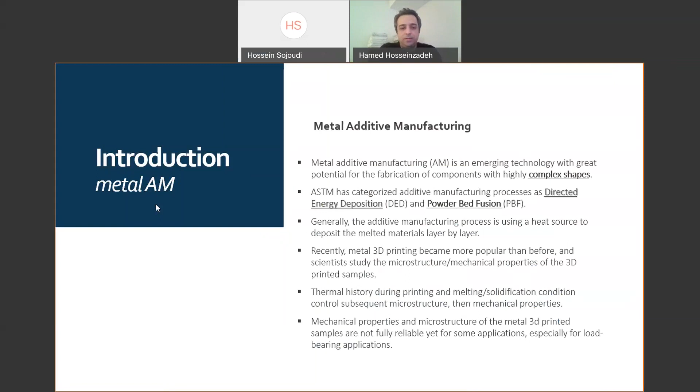Scientists are working to optimize the metal 3D printing process for commercial application. We have commercial metal 3D printers, but we still need to work to optimize the whole process. Because metal 3D printing is a complex process, and we have anisotropic material properties, innovation and improvement is difficult and expensive in this field. So we need to find a way to accelerate.

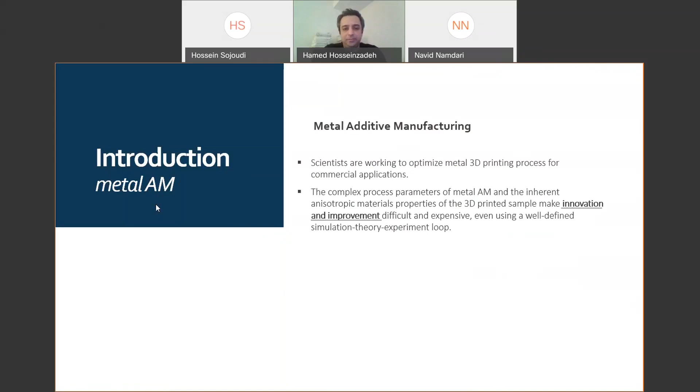So I think that it is enough to talk about metal 3D printing, because I'm sure that you are more familiar than me in this field. But about the innovation, in advanced countries like

the United States, the time from invention in the lab to a commercialized product, as an average, is 18 years. Do you have any examples where it took more than this time, or where the product could go to the market in less than 18 years? But as an average, this is the average time. If you have an idea, if you have a prototype of it in your lab, and you want to make it commercial, as an average it takes 18 years. You need to find a way to accelerate this process.

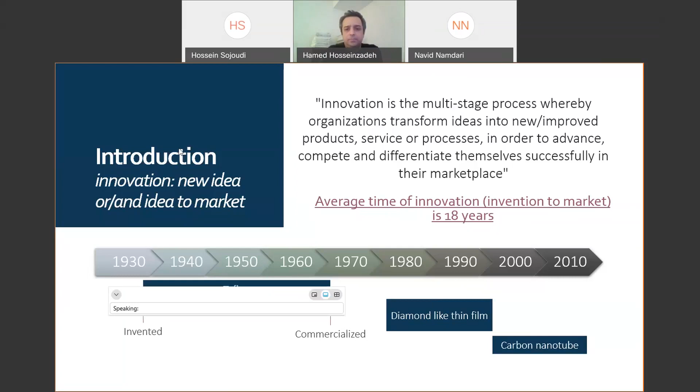So the question here is, how can we accelerate the innovation, invention and idea to market in metal additive manufacturing? I will discuss this and answer it at the end of this presentation, but please keep this question in your mind.

So we discussed the complexity of the whole process of metal additive manufacturing, and we know that computational methods could help us to understand the thermal history, thermal stress and residual stress in the whole process, which is not easy for experimental validation in this field. So simulation could help us a lot.

Okay, so we have some terms in simulation. One of the terms is ad hoc simulation, ad hoc research. In general, we have three approaches: experimental method, computer simulation, or an analytical method. You are all familiar with these three concepts. Based on the experimental method, we develop some analytical model. And when we have well defined analytical models and some experimental database, we can run computer simulation.

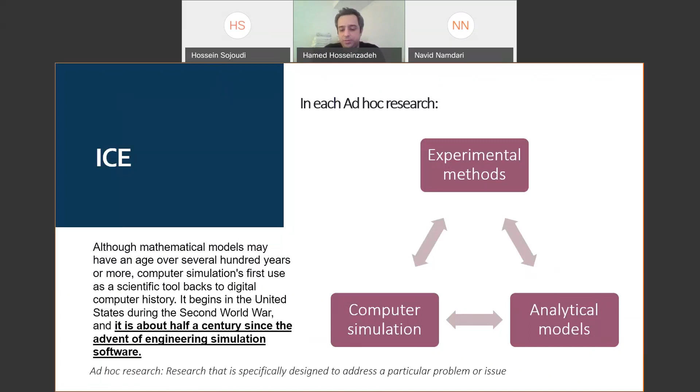Okay, so if you want to run ad hoc simulation and focus on a project, maybe we can develop a simple computer simulation. But sometimes we need to simulate the whole process and consider many parameters in our system. We need to use multi-scale, multi-physics simulation techniques, considering different scales from quantum, atomistic, to mesoscale and to macroscale.

In this case, our simulation is not ad hoc, and we use another term such as integrated computational engineering, or integrated computational material engineering. They are all relatively new disciplines, and their focus is to solve complex physical systems. This is a good approach for metal additive manufacturing, because metal additive manufacturing is a multi-scale, multi-physics, and complex system.

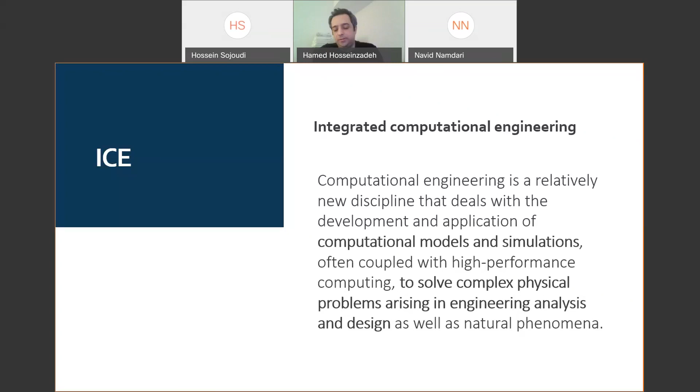And maybe for some cases we need to go to atomic scale. For example, if you want to simulate the nucleation in the melt pool, the solidification and nucleation of solid metal from the molten metal in the melt pool, we need to use quantum simulation. So we need to use the Schrödinger equation and solve quantum simulation for that. Mainly we need Newtonian mechanics, but sometimes we should use quantum simulation as well. So you can see that for computational metal additive manufacturing, we are in the quantum and classical non-relativistic simulation domain.

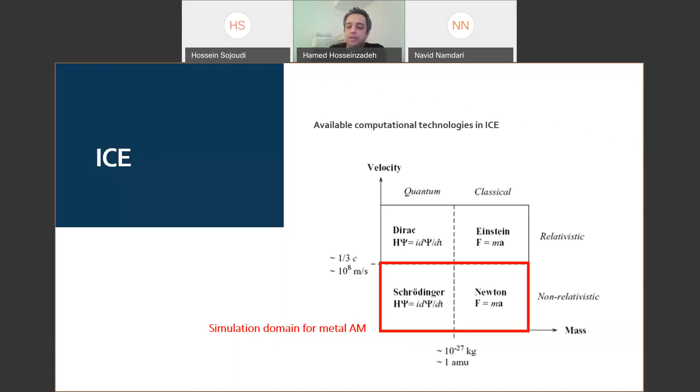So we need to check what do we have now. For Newtonian mechanics, we have conservation equations and constitutive equations. Constitutive equations are some famous equations like Fick's equation, Hooke's law, heat diffusion equation, which are developed by fitting a graph to experimental results or something like that. But conservation equations are the general concepts of balance of energy.

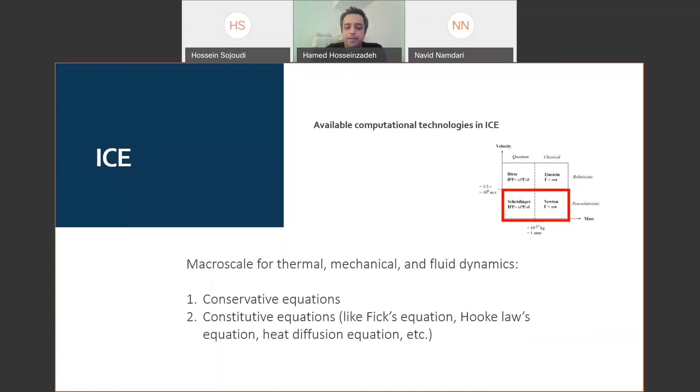We have three equations: mass, momentum, and energy. Mass and momentum are vectors, so each of them is three equations, and energy is a magnitude, so it's just one equation. Conservative equations are 7 equations. In the general form there are 3, but because we have x and y direction for equations 1 and 2, at last we have 7 equations.

Equation 1 is a continuity equation. We can discuss it later, but for the momentum, I think this is a very important equation. From this we can calculate stress, strain, deformation of the system, and internal stress in the system.

If we expand the equation, we have 3 equations in x, y, and z direction, and then you can see the details. Also, if we correlate the shear force to the viscosity by some assumptions, we can change this formula for fluid dynamics. If we use a constant viscosity concept and non-compressive fluid, which means we have constant density, this would be a Navier-Stokes equation. So you can use a momentum equation for solid and also for liquid.

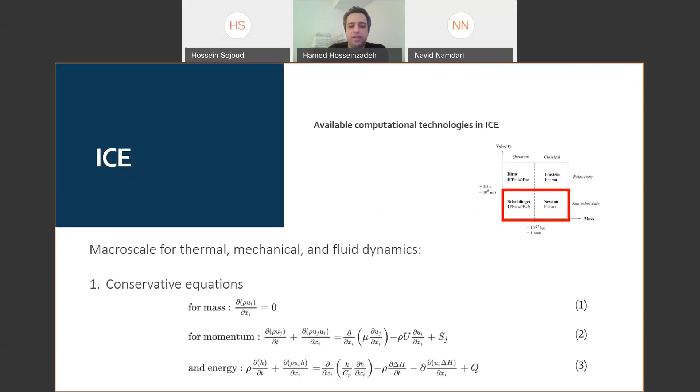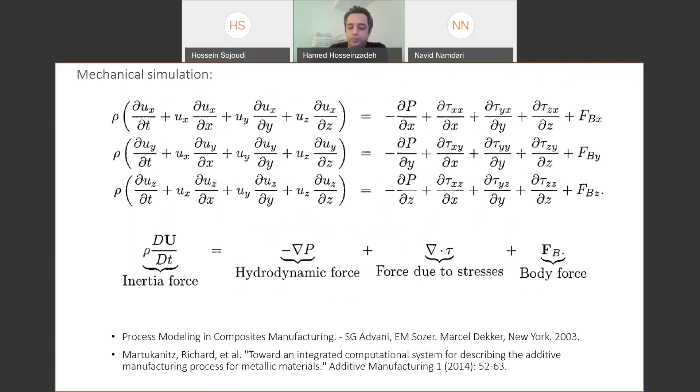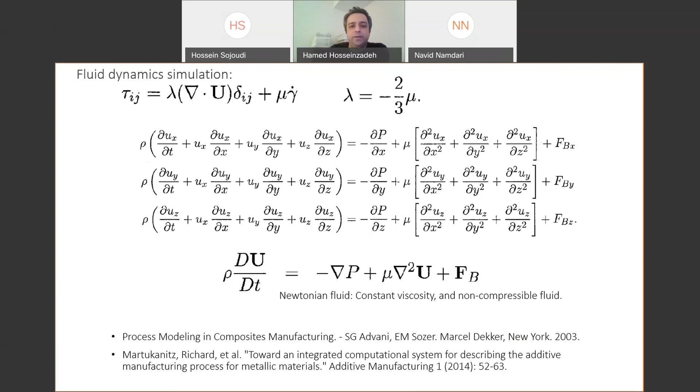The last equation, the energy equation, if we simplify it, we can calculate the temperature. So for metal 3D printing, if you want to calculate the thermal stress or residual stress, you need to use this form of the momentum equation. If you want to simulate the melt pool, we need to use the Navier-Stokes equation, but because we have a free surface, we need to add some other method, for example volume of fluid or other methods to capture movement of the surface of the melt pool. This Navier-Stokes assumption works very well for metal additive manufacturing, and also for thermal history we need this equation. They are very commonplace and simple to use.

For the mesoscale, if you want to simulate a microstructure, we need to go to mesoscale. We have many methods, but the standard methods are discrete ones and continuous ones. Discrete ones like Monte Carlo and cellular automata have probability; they have a stochastic concept.

The phase field is a continuous method. You can see the equation of that. We have an order parameter, and we develop the energy of the system based on the value of the order parameter and the slope of the order parameter. We define the energy of the system and put it in the time-dependent equation. So we minimize the energy for the order parameter, and we can capture the movement of the order parameter. The order parameter works as the interface in this.

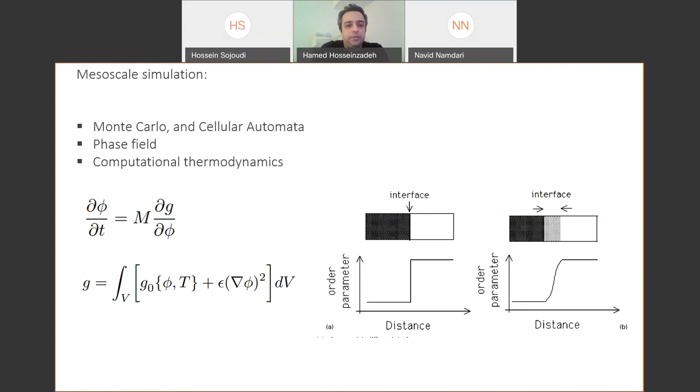So, for example, if you have a grain, a polygrain system, and you want to see the grain growth, the order parameter is the grain boundary of the system. We also have computational thermodynamic methods such as CALPHAD for predicting, for example, the binary phase diagram. Based on that, and if we have a cooling curve, we can predict the microstructure based on computational thermodynamics. So these are the three main mesoscale methods for predicting the microstructure.

We need to solve all the equations, so we need to use numerical methods. We have several famous numerical methods: finite element, finite difference, mesh-free, finite element discrete method, time domain finite difference method. If someone asks me which one is more accurate, I would say all of them are good for simulation, and it's up to you to select which one is better for you.

The accuracy of all of them is enough for most engineering applications. But according to the system, sometimes we need to use finite elements, sometimes finite difference - it depends on the system. We should discuss based on the physical system.

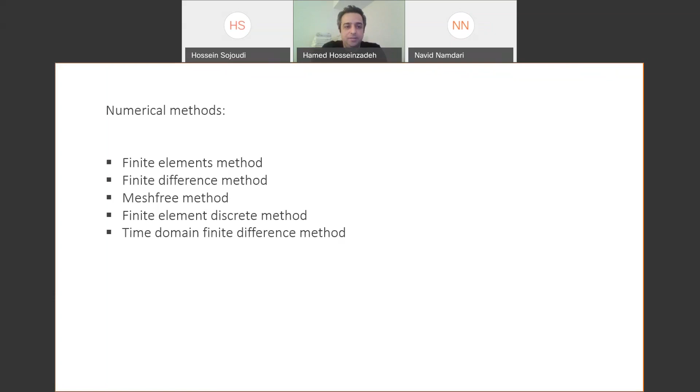Okay, so these are the general concepts and the computational technology that we have. Now I want to focus on computational metal additive manufacturing - what we want from simulation in metal additive manufacturing.

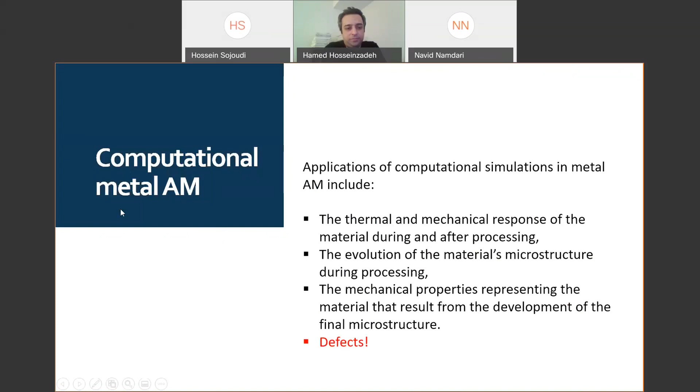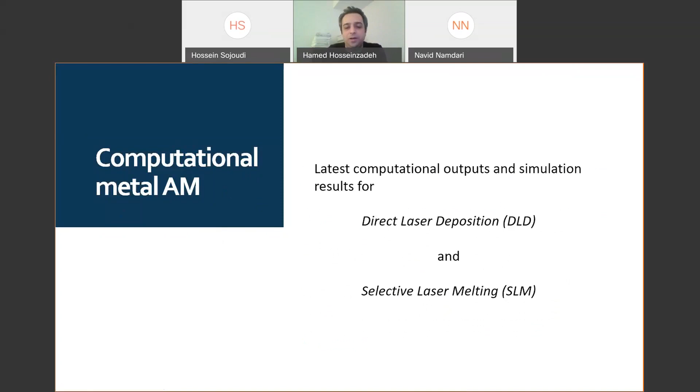As we discussed, in computational metal additive manufacturing we have two techniques: one, laser deposition; the other, selective laser melting. I'm talking about laser - we can change the heat source, but in this presentation I'll just talk about laser. Let me talk about some details about these two methods. Laser power of SLM is in the range of 200 to 400 watts. Laser power of DLD is 500 watts to 10 kilowatts, so you can see the laser power in DLD is much larger than SLM.

The other thing is the laser diameter. Laser diameter is around 100 micrometers in SLM, and in DLD method it's around 1,000 micrometers. So you can see that because of this, we have two different length scales of simulation. If we want to capture the thermal simulation in SLM, we need to have mesh size lower than the laser diameter, so the mesh size in SLM method is much lower than DLD.

The other thing is the scan speed. Scan speed in SLM is several hundred millimeters per second, but in DLD it's just several millimeters per second, maybe 1 or 2 millimeters per second. So the heat input in DLD is much larger than SLM.

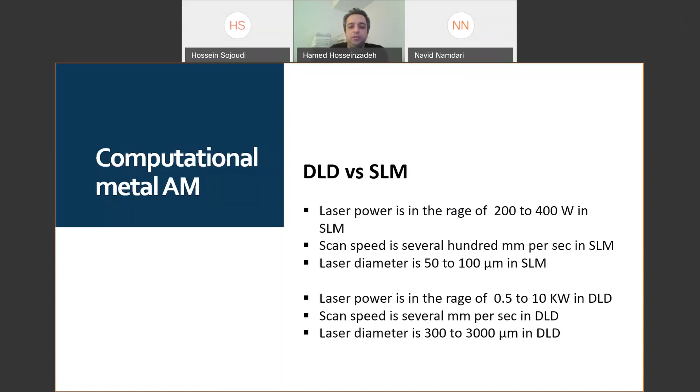Because of these example parameters, the simulation method of SLM and DLD is not the same. We need to use different assumptions, different computational methods and techniques to simulate each of them - they are completely different.

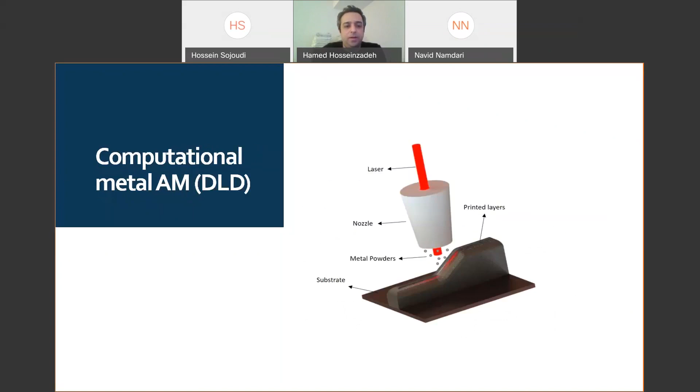So I need to discuss each of them separately. First, I want to start talking about DLD.

The first important subject in the DLD method is how we can update the simulation domain during each time step, because we have molten metal received from the printer nozzle, and we need to add this new molten metal during each time step to the simulation domain. This is very challenging if you want to consider it as a liquid, as molten metal, and use fluid dynamics. We are limited to a very small part of the sample, and we need a huge amount of CPU time. So if you want to print a larger sample to see what is the total deformation in the sample, definitely we need to use another technique.

I need to be honest with you, the only method for simulating metal DLD for a large sample is the birth and death element method, or birth element method, which means we discretize a large sample, but kill most of the elements. The value of the element is 0, so they are not involved in the simulation. When we need them, we activate them. This is the only method we have right now for the simulation of the large sample. You can see in the graph...

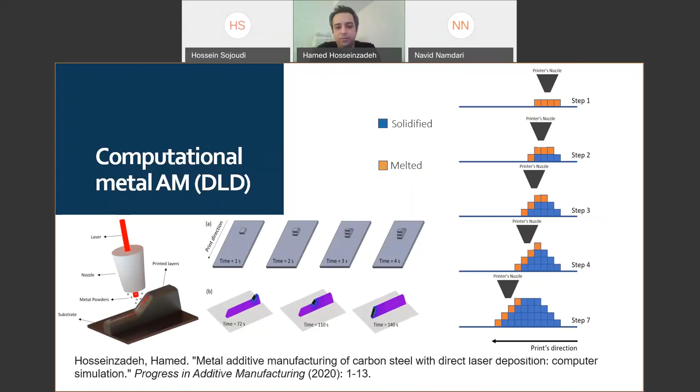You can see that from step 1 to step 7, how we add new elements. Consider each box as a computational element. At the beginning, we discretize the whole system, but all the elements are dead. In step 1, we activate just 4 elements which are yellow. In step 2, we have blue boxes which are solidified now and active, and we activate 4 new elements according to the movement of the nozzle, and so on. This is the only way. We don't have another computational technique yet.

This is the general algorithm. I don't want to go through the details. You can take the reference published about that.

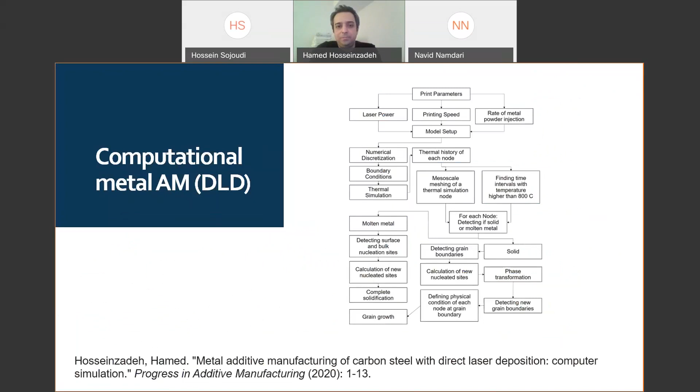So what can we get from this simulation? We can add some computational sensors and extract thermal history, mechanical history, and microstructure for those computational sensors. For example, in this figure, we have 4 layers printed on each other with the DLD method, and we have 3 sensors, A, B, and C. You can see the distance of each point from the top of the first printed layer.

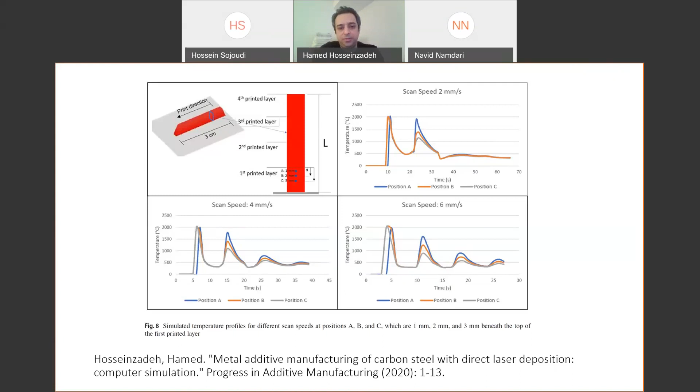If you check the graph, you can see we have different scan speeds: 2, 4, and 6 millimeters per second, and you can see the difference between each layer. I don't want to discuss the effect of scan speed in detail, I just want to show you the capability of the simulation.

Also, if we change the laser power, we can see for these are all for one sensor, and from that sensor we change laser power while keeping the scan speed constant. You can see that if we increase the power, what would happen to the von Mises stress and also the temperature.

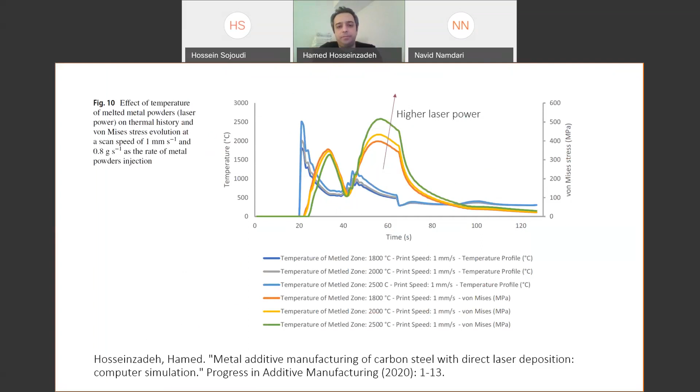If we increase the laser power, you can see we have a higher level of temperature and also stress in the sample. We can also take the rate of powder feeding. If we increase the rate of powder feeding, it means we have more heating, so you can see that we have a higher level of stress in the sample.

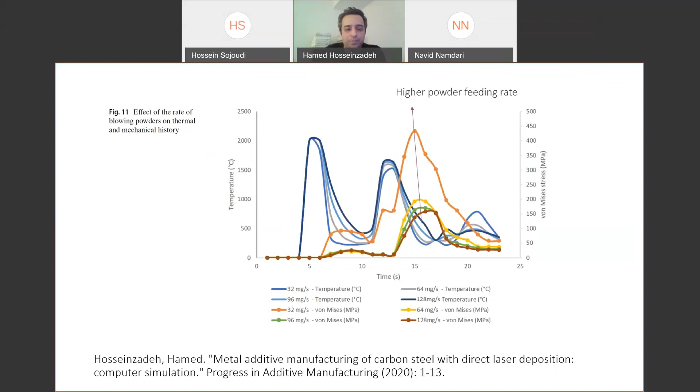As a general computational method, this is the only one for large samples right now, and we can simulate the process of the DLD method, and check the effect of different variables on our sample to see what would happen to the total distortion and residual stress if we change scan speed, laser power, and so on. So we can simulate the whole process.

Because we can calculate the thermal history, heating and cooling curve for each point in the sample, we can run mesoscale simulations, such as Monte Carlo, cellular automata, Potts model, or continuous ones such as phase field, and predict the local microstructure and grain structure, to see if it is equiaxed or columnar.

If you look at one of them, for example point A, we have the cooling curve of point A, and after each peak, we can simulate the microstructure.

These are stochastic simulations with cellular automata. You can see after the first peak and second peak, we have a columnar structure, and at the end we have new nucleated austenite phase or grain. This is a steel because I said austenite.

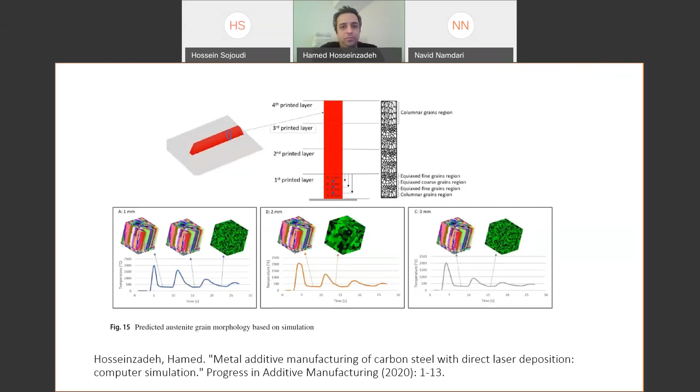So if you repeat this for different critical points in the sample, we can prepare a map of the microstructure of our sample. If we have a complex structure, we can add computational sensors at different sections and extract the heating-cooling curve and calculate the final microstructure for that point to see if it's what we want. If not, what would happen if we change the scan speed or laser power? Can we revise it or not?

You can see in this graph, if we increase the scan speed, the final grain size is finer. If you want a finer microstructure, in this case we need to increase the scan speed. This is one of the variables we can change to optimize the microstructure.

So what I want to say is I want to talk about the capability of simulation in metal additive manufacturing. We have computational facilities we can use to optimize the print parameters to get the final microstructure that we want.

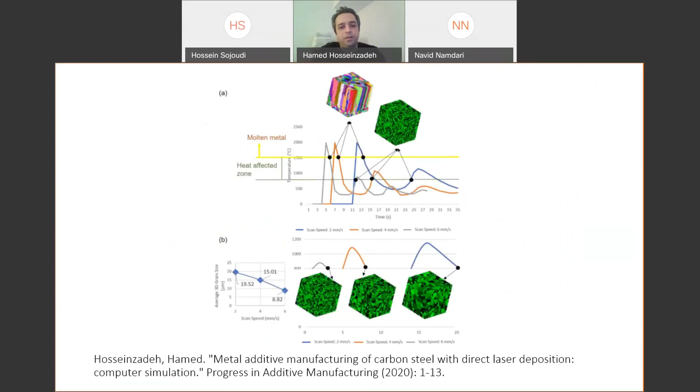All the simulations shown are done by my personal codes. We have other codes you are familiar with, so I won't advertise them. One is ANSYS - everyone knows this software. We have two other softwares; I don't want to give you the names. If you want, please email me and I will share all the information about the softwares.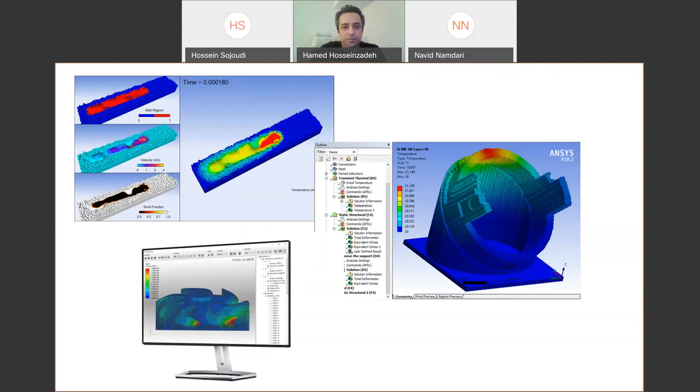I don't want to talk about that right now because it's up to them about their technique. But we have several softwares you can search and use one of them for your simulations. For SLM, I told you that the computational method for SLM and DLD is different because of the physical length scale of these two methods.

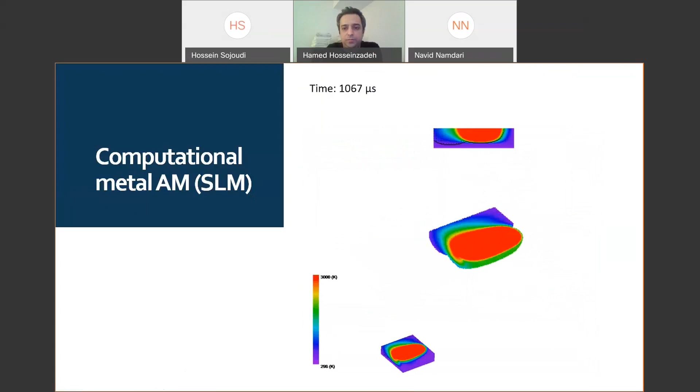Let me show you a video. This is computational - we have a small cube and we want to print it with SLM. See what would happen. If the laser moves, you can see how we can print it with simulation.

So again, in SLM like DLD, we need to find a method to simulate the local melting because we have a moving melt pool, so we need to capture that. This one is simpler than DLD because it moves in a plane. You can see step 1, step 2, and step 3 - it's very simple.

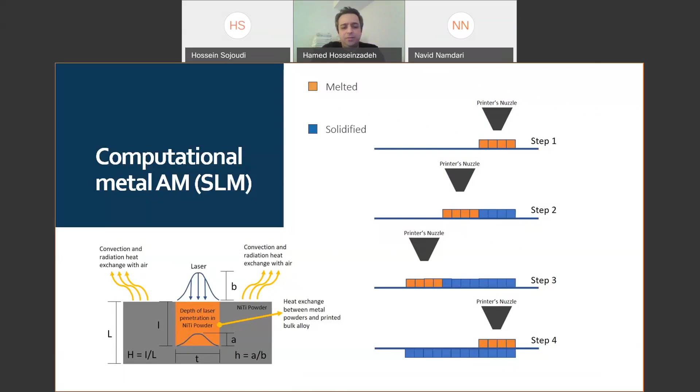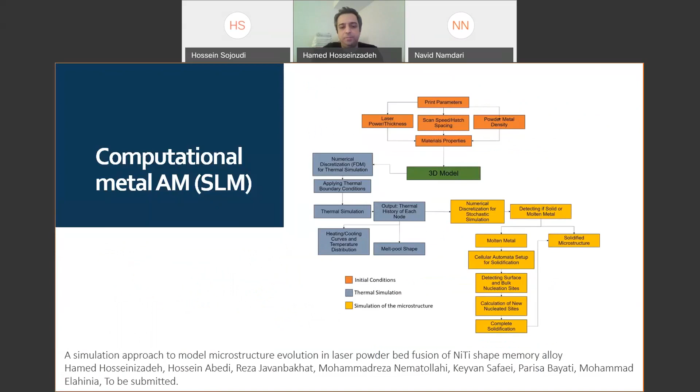You're familiar with the function for the laser and the boundary conditions, so I won't go through that. Again, this is another algorithm from an unpublished research paper, but when published, you can see this.

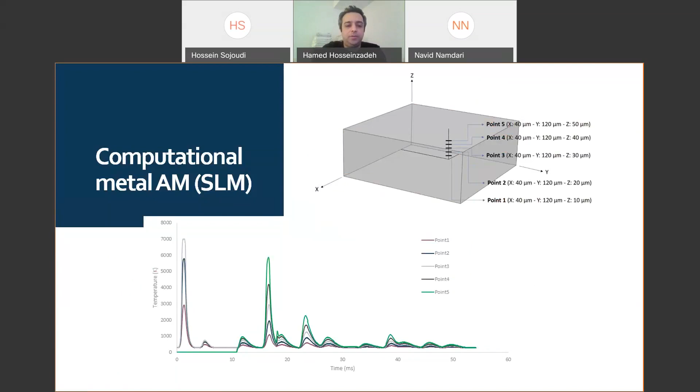With the computational method in SLM, we can add some computational sensors. So again, like DLD, we can simulate the heating and cooling curve. You saw the video - it shows captures from different times. You can see the movement of the melt pool by moving the laser, and finally you can see the printed cube.

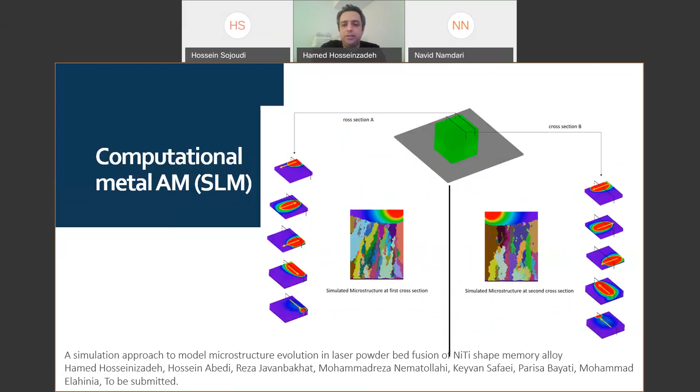So at the end, simulation can help us simulate the thermal history and the mechanical properties, and final deformation. Also, like DLD, we can simulate the microstructure.

This one is easier to simulate the whole cross section, not just a very small part like DLD, because in SLM the laser is moving very fast. So the time scale is almost less than a millisecond, which is almost comparable to the solidification time scale.

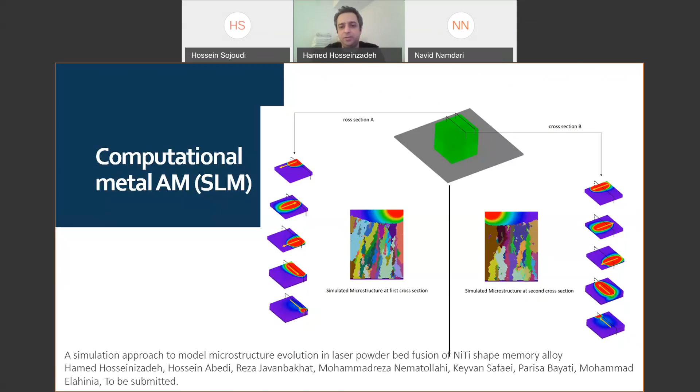So we can simulate the microstructure for a larger cross-section in comparison to DLD. Because of the different nature of these two processes, we have some limitations and some benefits. This is a benefit in SLM. If you look, we have two cross sections, each with a different print pattern, and at the end you can see the final microstructure. This is an unpublished paper, but I think the results are nice to share.

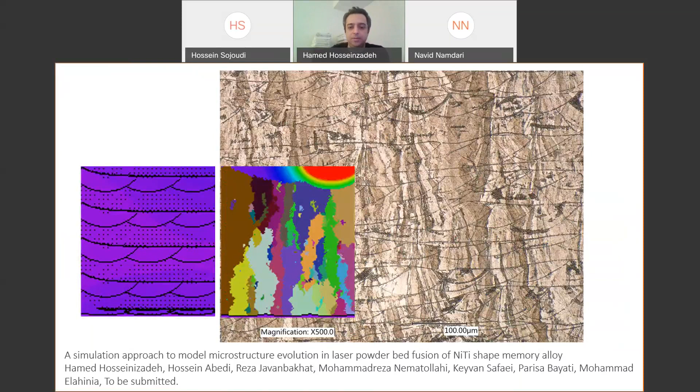So in SLM, again, we have enough computational methods, and they are almost accurate to simulate thermal history, mechanical properties, deformation, and also microstructure. This is another video, I think that is easy to share.

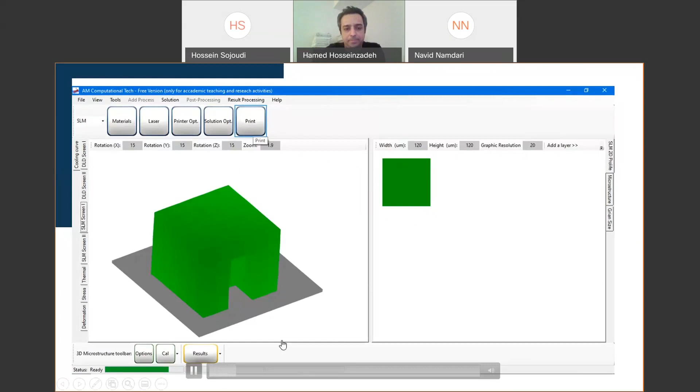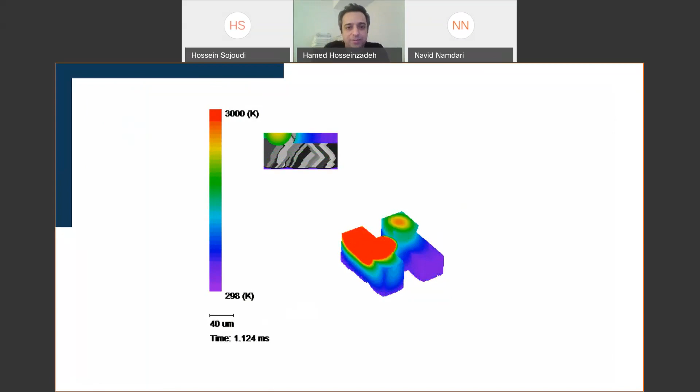In this video, you can see the microstructure during solidification. I told you that because the laser is moving fast, the time scale of solidification and the laser movement is almost the same, so we can capture it. You can see the grain structure; the gray scale differentiates between each grain, so the color meaning is a grain.

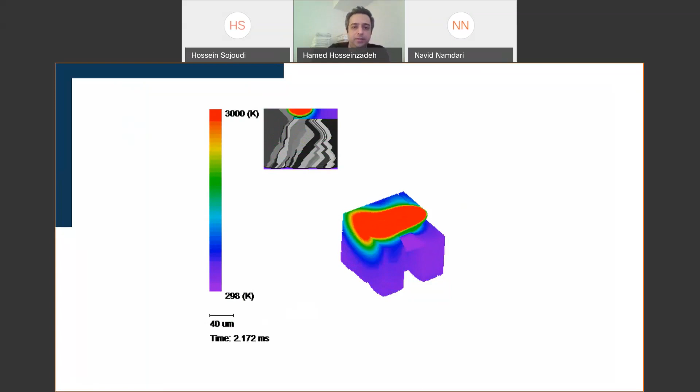So I talked about the computational method. We are using conservation equations for energy, momentum, and mass to simulate at macro scale the thermal history, mechanical properties, residual stress, and deformation. For these, we can couple the macro scale computational method with one of the mesoscale simulation techniques.

We have some limitations. I told you that if you want to print a large sample, we could not use fluid dynamics because we need a large CPU time. But if we use many assumptions, like the ones I explained, using the birth and death element technique, we can print a larger sample.

And at the end, we can run ad hoc simulation or process modeling. Process modeling is one level after ad hoc simulation. In process modeling, we will consider several effects of several parameters on the quality of the final printed sample. So this process modeling is kind of several ad hoc simulations.

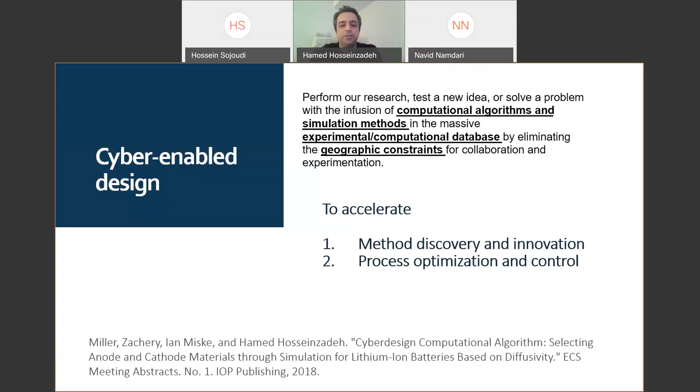As a summary, for the cyber-enabled design, we need a software for integrated computational engineering. In the cyber-enabled, this is a computational brain. Also, we need computational big data, experimental big data, and internet to connect all of them together. This is a cyber-enabled design. So we need to have an experimental database, computational database, and computational brain.

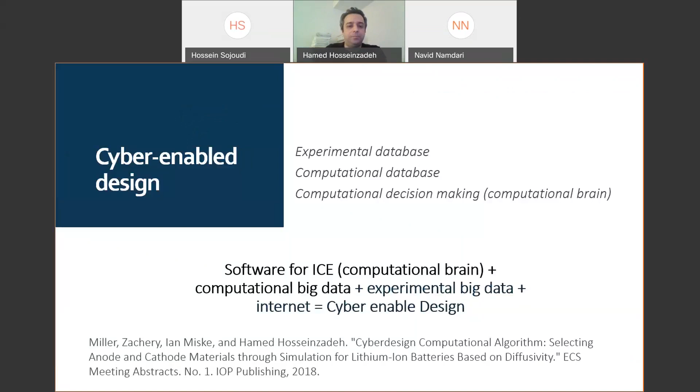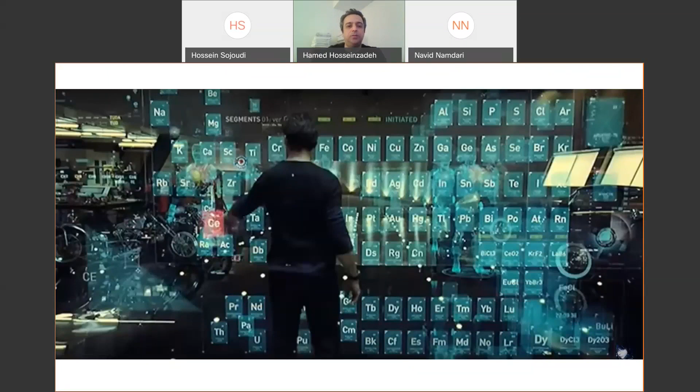So far, we do not have this platform of all these three databases and brain, computational brain. We need to work to develop this. I want to show you some Hollywood version of that. If you could do that, it would be something like this. You all saw this. It's a computer that Tony Stark talked to, to design a material and his final exoskeleton. If you could do that, this is what is cyber-enabled.

But do we have an example right now for the experimental database? I don't know, I couldn't find one. But for computational database, for almost 10 years some scientists have been working on the materials genome project. They are working on high-throughput computational methods to prepare a database for some applications. For computational brain, I couldn't find one. I think maybe because of Industry 4.0 someone wants to work on it, but at this time I'm not so sure that we have some publication on this topic.

So if we combine cyber-enabled with a high level of AI, artificial intelligence, at the end we would have a Tony Stark computer. It's just for fun. If someone asked me, do we have computational technology for making a Tony Stark computer for Iron Man? My answer is a big no. Our computational methods, numerical methods, even finite element or whatever, are not accurate enough, not fast enough, and not advanced enough for that technology at this time.

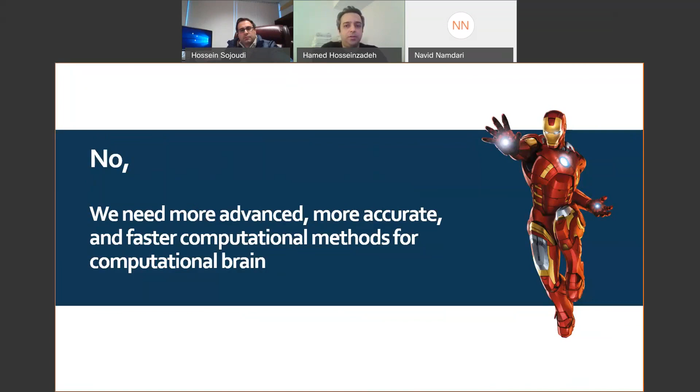So with the current technology that we have, I believe we could not design a computational brain that looks like this computer in the Hollywood movie. We need to extend it.

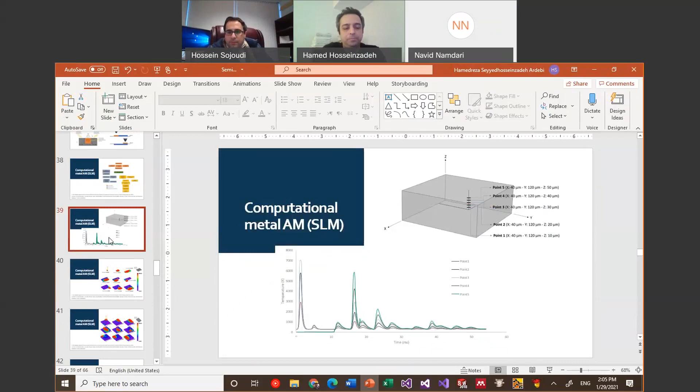Okay. The input material properties in our simulation are temperature dependent. This is the only anisotropy. If you mean direction, for example this plane or this crystal plane, we didn't add it for this simulation, but it is very easy to add if necessary for fundamental research. That's for input material. If you mean the output material properties of the printed sample, yes, simulation could predict that. If you predict the microstructure, you can see the anisotropy, so different material properties in different directions.

If you put your questions in the Q&A, that would be a lot easier. Corey Williams has a question. Did you add your own methods for the ANSYS simulation, or was it built into ANSYS already? As I understand, the question is whether I wrote a module in ANSYS or used ANSYS. For my simulation, I use AM Complex software that I developed myself from A to Z. So this is a standalone code. I didn't use ANSYS or other software.

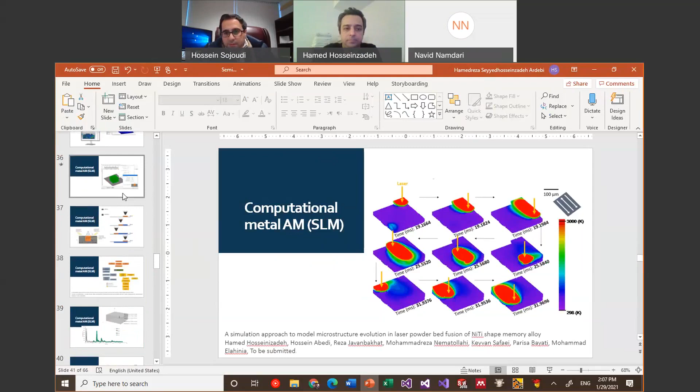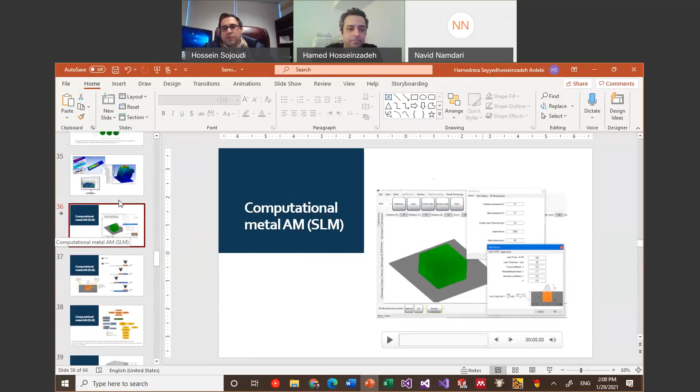Corey, is that what you were trying to ask? If no, just put a follow-up here. So, any other questions or comments? I thought I saw an ANSYS image earlier. Okay, that's confusion here. So I guess Hossein Abedi has a question too. Sorry guys, because of the time, I'm just going to read your questions if that's okay. And the issue we have.

So Hossein is thanking you for the presentation. And the question is that you have the simulation, thermal and microstructural modeling. What is next to be added to make it more complex? I couldn't hear your last sentence. Could you please repeat it? If you hold it on mute, because apparently when we both speak there is a problem, you will probably hear better. So the question Hossein was asking was related to the simulation. He's saying that you have the simulations where thermal and microstructural modeling is done, right? So what are the next steps to be added to make it more complete?

Okay, so the first step is we need to develop an efficient computational method, because for a very small part of the sample, we need to run more than 20 hours of simulation. So simulation needs a huge amount of CPU time. We need to use and develop good assumptions to reduce the computational time. This is the first step. At this time, we have the code, and it would be good to add more accurate assumptions to simplify the system and reduce the time of simulation.